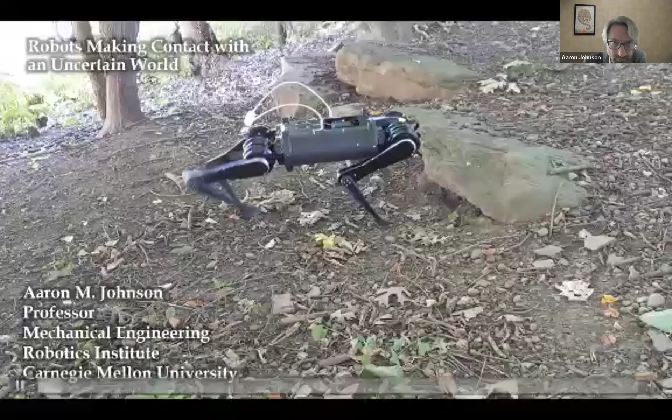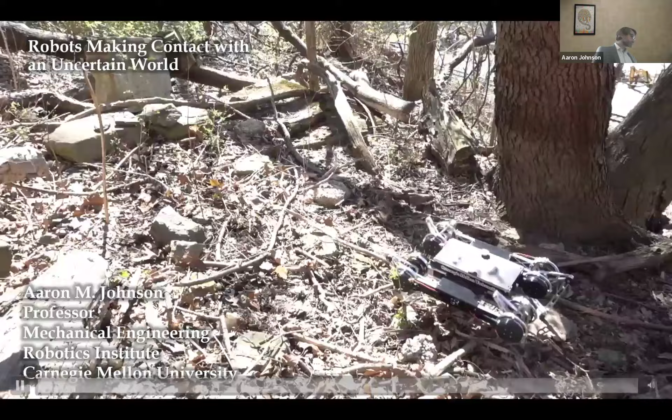We need to give it some time till people show up. The problem is I think the Zoom link was a bit hidden in the advertising. Hope people know about that. Yeah, no one's on Zoom. Yeah, but we're still 5 minutes early. Oh yeah, all right, let's.

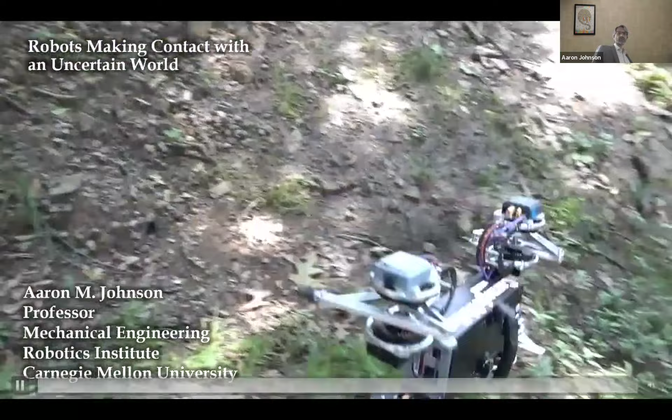Yeah, then I have my video and camera. Or audio, we've used that at least. Actually, I might leave the video on. I don't know, might be videos might work better, if it's not wasting bandwidth on me. Exactly, no it's good. But yeah, okay.

We'll look at this later in the video. Maybe I should put it behind you. Would it be visible if I put it behind you? I don't think so, right? Yeah, probably not. Here, maybe it is. If I turn off my virtual background... No, let me put this one. Don't let me know.

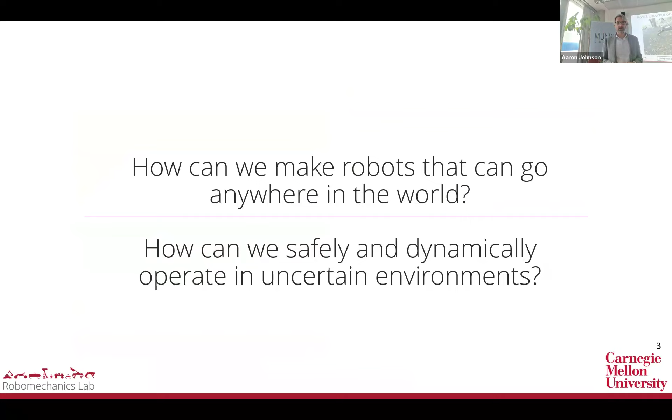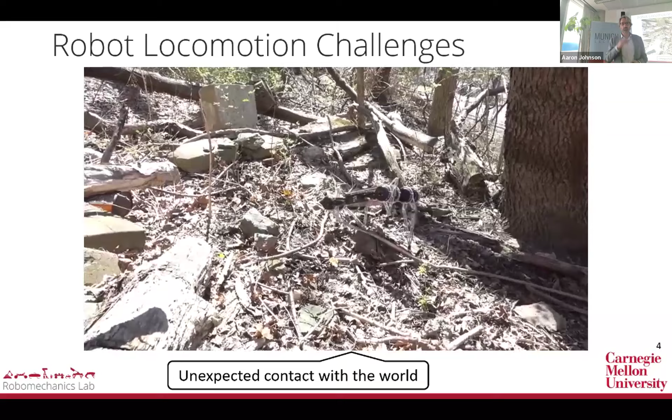On the locomotion side, this was the video playing when you came in—it's like a blooper reel of us testing different legged robots in the park behind campus. What I want you to think about in each of these clips is that the common theme is unexpected contact with the world. The contact is not what the robot had planned.

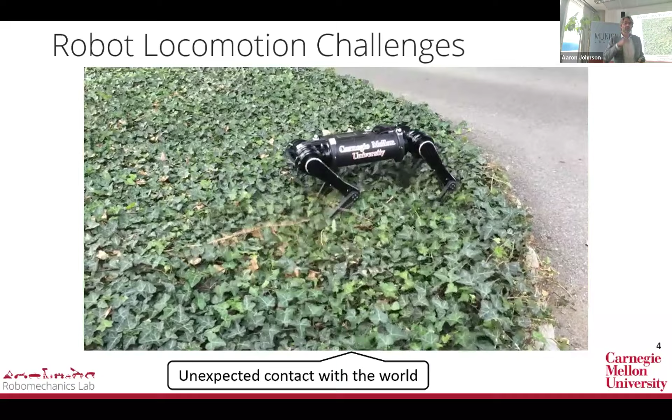So here, it doesn't know that it's touching these vines that are catching it on its legs. Other times it bumps into a branch it didn't know about or thought it could clear, and instead its foot hits it and it gets stuck. And other times it thinks it's going to make good contact, puts its foot down, but it misses, and the foot falls over the edge—there's a missing contact that causes it to fall.

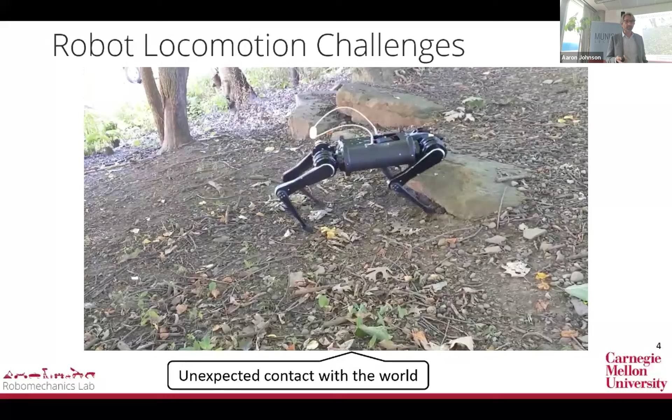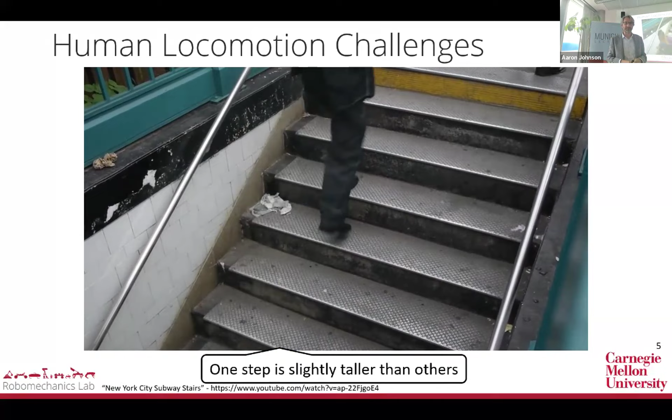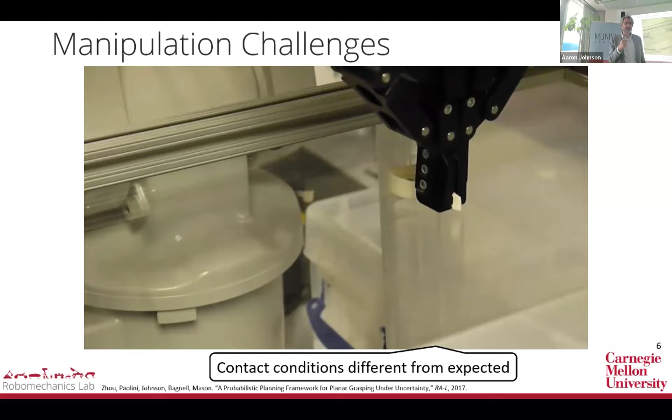So this is exactly the same as the robots. A lot of what we do is locomotion based, but all of these things apply to manipulation as well. Here's another blooper reel from a manipulation paper I was on, where we're trying to pick up small objects. Again, all of these errors come down to contact conditions that are different than what we expected—either the friction is too high or too low, or it goes to squeeze and misses, or it bumps it early and knocks it out of the way. All of these are sort of uncertainty in the contact conditions.

So a lot of the projects, maybe all of the projects in my lab, focus around these two key challenges. The first being...

All right, so the two challenges are contact and uncertainty. Contact, and in particular the discontinuous nature of contact. When my foot is on the ground, I can get very large contact forces. When my foot is a millimeter above the ground, I get zero contact forces, right? And that kind of discontinuity in our dynamics breaks a lot of the assumptions we have in our state estimation, control, planning, even learning algorithms, which assume continuous, if not something stronger, like smooth or convex dynamics.

And then uncertainty. These are all domains where we're not going to know the friction on every single rock that we step on, right? We're not going to know how squishy this mud is. And furthermore, I don't think that we can know these things. It's not just that we haven't done enough modeling or characterized the site well enough—we're expecting to have variability as we move through. So instead of trying to engineer away all of that uncertainty, like you might do in a factory where you can control the lighting and the way things approach your robot, we're just going to embrace that uncertainty and come up with algorithms that don't require a perfect model.

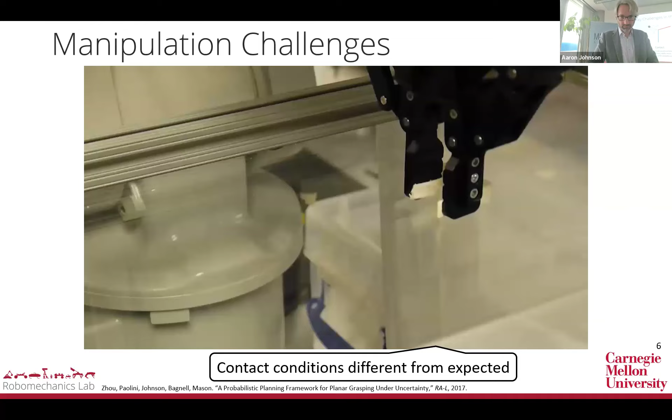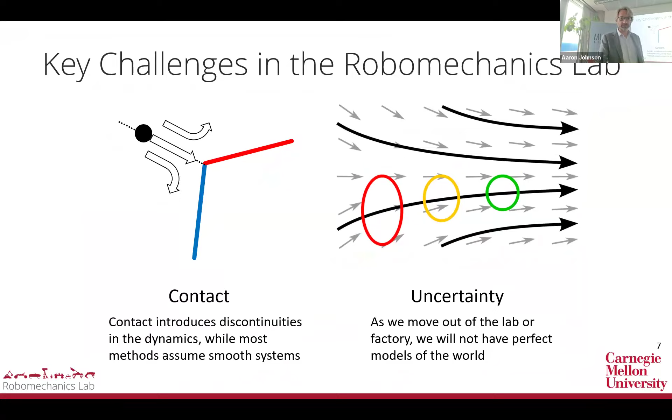Yep, good. All right, so again, two key challenges: contact and uncertainty. I'm going to go through three main projects where these themes come up and how we've addressed them in different applications. The first is going to be Kalman filtering, so state estimation for hybrid dynamical systems. By hybrid dynamical system, I mean systems that have both continuous and discrete state. In this case, our continuous state will be things like position and velocity, and the discrete state will be our contact conditions. So how do we do state estimation when we have changing contact conditions?

First, just some background—what is Kalman filtering? Maybe you took a class in this five years ago and don't remember, or even if you use it a lot, here we can get some notation and terminology in common. The idea with Kalman filtering is we're trying to figure out what our state is at the current time. We represent that as a mean, shown by that dot, with some probability distribution around it, and in Kalman filtering that's a Gaussian. There are two steps in Kalman filtering: the first is a prediction step, where we play our dynamics forward and say, if that's where I was, here's where my new state is expected to be after some time step.

As we propagate that forward in time, we expect the uncertainty to grow, right? Over time, we're less and less certain about where we were because more noise and other things can come in. So then how do we reduce that uncertainty?

We take measurements. Let's say we can see some point out in the world, or we can touch the ground, get some sensor measurement that tells us something about our state. It says, based on that, I think the most likely position is this other spot. And then the magic in Kalman filtering is the optimal way to combine these things to get our new best estimate with a reduced uncertainty from that sensor reading.

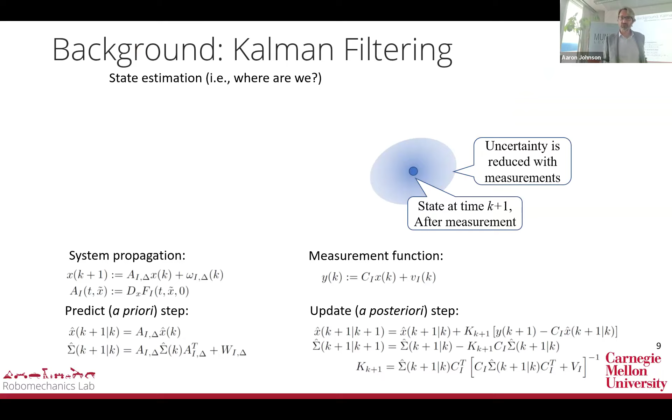What happens if we have an impact? What happens if we have a change in our contact condition? We have this discrete impact, our leg smacks, hits the ground. I'll explain this for the prediction step, but it's the same idea for either step.

Don't worry too much about the math down here, but the key thing to know is that when we're predicting our covariance in the continuous phase, we use this A matrix, which is the Jacobian of our dynamics. That's how we propagate that covariance forward, and it tells us how much our uncertainty will grow and shrink as we move through our dynamics.

So for the mean, we know how to simulate our contact event. We can have plastic impact, elastic impact, whatever model of contact we want to have. But then what do we do about the covariance, about the uncertainty around that?

An initial hypothesis would be to use the Jacobian of our impact law, of our reset map, because that's sort of what we did in the continuous domain. And that turns out not to work.

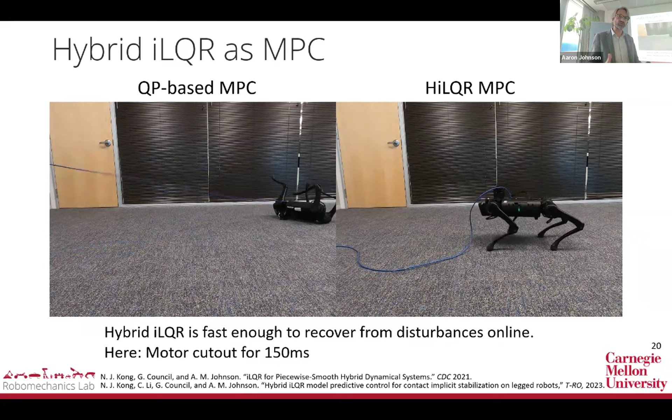All right, so this whole first section was thinking about cases where we have a good model of our contact, in particular rigid plastic impact. How do we reason about uncertainty and propagate that through these kinds of transitions?

Next, I want to talk about a setting where we don't have good models of what the contact looks like. And for this, we're going to think about moving through vegetation.

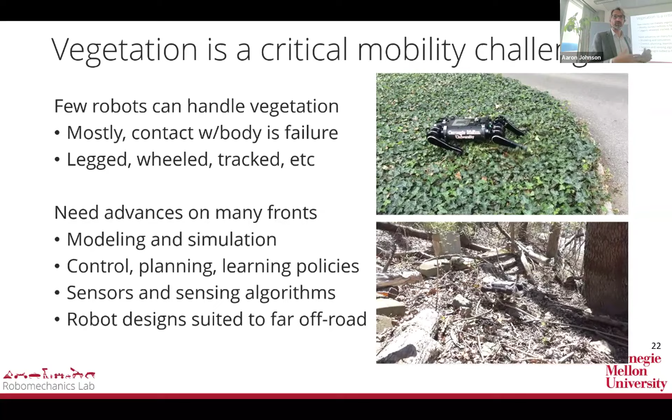This is a critical mobility challenge. We can have our robot walk down the sidewalk, but if we want to get off the sidewalk and walk through that pile of plants out there, the contact is going to be much harder to model. It's going to require much more careful control, planning, learning. Sensing becomes much harder too. All of these things become a bigger challenge when we're interacting with bushes, grasses, trees, these kinds of things.

So we're never going to just walk over the tree. We have to walk around it. Some obstacles you have to go around.

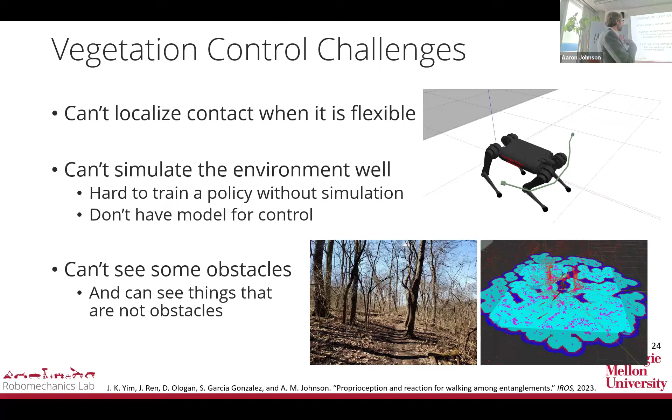So in this kind of forest setting, here's an actual LiDAR scan. All of those pink dots are a LiDAR return from some little twig sticking up, or a blade of grass. If you pass that into your planner, it says there's no path through this space where you don't contact something, which is true. You have to bump into stuff. And so we have these major sensing challenges.

What I'm going to advocate for here is that we think about how we're going to handle vegetation at multiple different levels. Here I've got our model-based hierarchical control scheme, but I think the ideas apply to whatever kind of control scheme you have. Maybe some of these are learned policies instead of MPC.

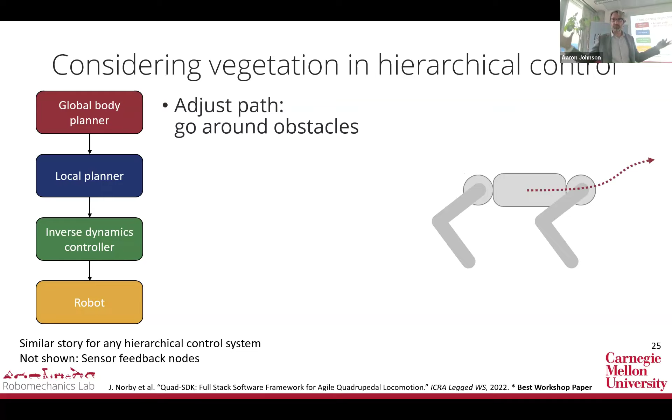But the idea is that at the highest level, your task planning level, you need to adjust your path to go around the big obstacles, right? We got to go around the trees and the big rocks and that kind of stuff. So we need some high-level planning. We want to adjust our gait to maintain our balance and wriggle out of obstacles.

At the foot swing level, we need to come up with ways of disentangling our leg as the foot is moving forward. And then you can even think at the low level joint, usually this is a PID loop, at the joint stiffness level, how do we achieve our plan?

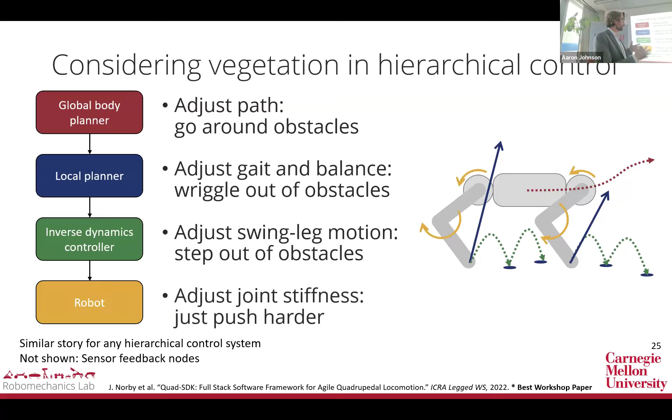Sometimes we just need to push harder, right, if you're pushing up against something. Other times, if it's a rock, that's not going to work. So we need to have a reaction, we need to think about our response at each of these different levels.

So I'll start at the inverse dynamics, this green level here. Our approach to handling vines and obstacles has two main parts. The first is going to be a link momentum observer. How do we know that we're caught on a vine or other obstacle?

The idea with a link momentum observer is that we have a model of our leg. We don't have a good model of the vine, but if we compare what our leg is actually doing to our predicted momentum based on our model, if that deviates by too much, we must be touching something, right? This won't necessarily tell us what we're touching, and we may not be able to predict what the force will be next time, but we can know if we're hooked on something preventing us from following our desired trajectory. And then if we know we're touching something, let's come up with a reactive controller that can get us unstuck from anything.

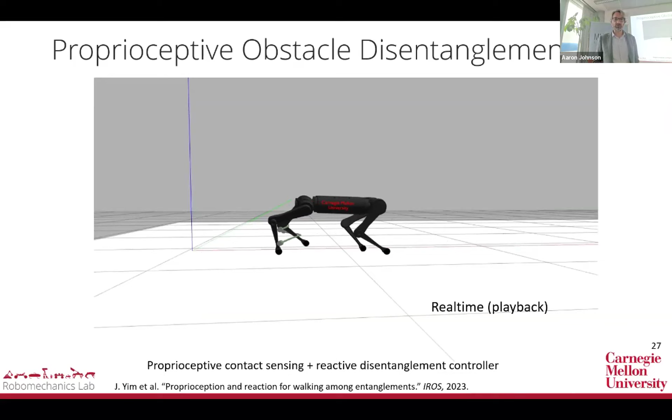All right, so what does this look like if we put this together? So it's going to walk, using this link momentum observer. So when the leg gets hooked, it says, I'm touching something. Let me do this recirculation, get my leg unhooked, and continue making progress forward.

And so this way we have huge uncertainty, we don't have any real model of the vine. We don't know where we're touching it, but we've come up with a strategy where we don't need to know any of those things, right? And that's what gives this the robustness.

So here it is on the robot working on a variety of obstacles. We've got low stiffness as a bungee cord, this is kind of like our vines. We've got a stiff rope in the upper right that's not springy. We've got a rigid beam, so this is just a metal plate. And then the bottom right is all of the above mixed together in some kind of robot torture device where it has to get through all of the obstacles together.

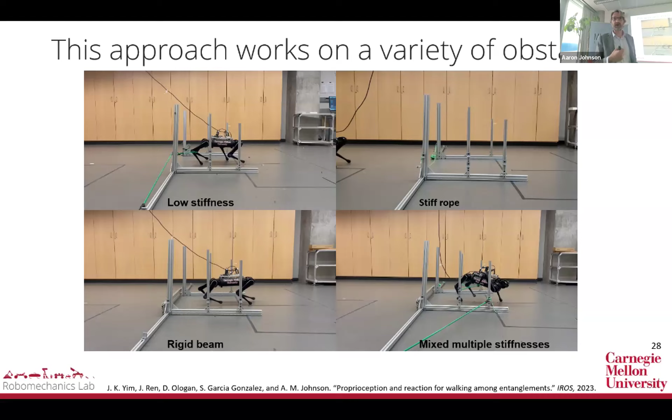But again, because we're not trying to estimate the stiffness of the vine, we're not trying to say, oh, here's where we're touching this one. There can be two things touching. There can be hard and soft mixed together. It doesn't really matter.

And then my favorite, we took a soccer net and laid it out horizontally, so it's just a field of things to get tangled up on. It kind of trips a little bit, as you'd expect, but it's able to get its legs disentangled and continue making progress forward.

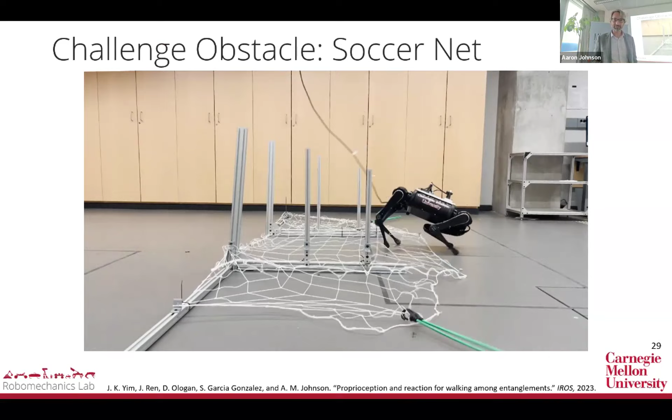So this was how we disentangle at the leg retraction level. If we go up a level in our control hierarchy, we can advance our leg and take another step, but we may not know what we're walking on.

On the left is the robot's model of the world. On the right is what it's actually walking on in simulation. This is the case where you have grass or other vegetation - you can have a camera or LiDAR, but that's mostly going to see the top of the grass, not what your legs are actually walking on. So we use proprioceptive sensors to feel where the ground actually is and build up a map of the terrain as we walk around.

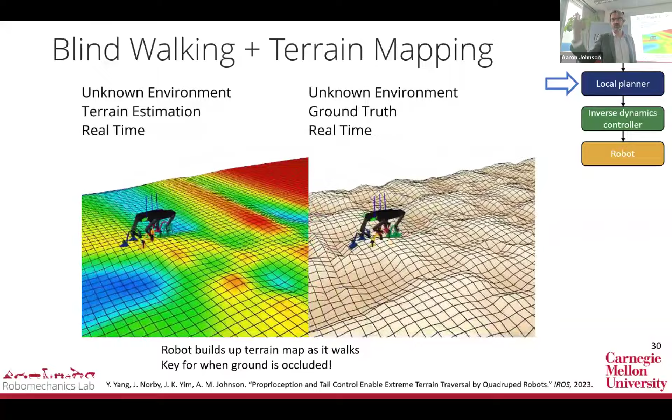Now we can plan on that map for the next step. Maybe I'm not expecting a mound of dirt right there, but as soon as I touch it, I know it's there, and I can plan accordingly as I continue moving forward.

So we reduce that dependence on exteroceptive sensing that's going to have occlusions. And then we can go even higher - there's lots of ways to do this, but the short story is go around the trees. We're not going to try leg disentangling to walk through a tree, or even use the proprioceptive approach. We could walk into the tree and tell that we stopped making progress, but for big things we want exteroceptive sensing to see there's a tree and plan around it. We've written papers on path planning, but any high-level planner, we still want that at the highest level.

So what have we learned about walking through vegetation? I think modeling the vegetation is the wrong direction to go - there's too much variability, we're never going to know these parameters. Instead, let's come up with approaches that don't require a perfect model and can be robust to huge amounts of uncertainty in the state and in the model. And then we need to think about how to handle this at different levels of our control abstraction.

I should also mention all of this quadruped control stuff we've done in the lab is part of our Quad SDK open source control stack. So if you want, you can download the code and run all of these examples afterwards, including the vegetation disentanglement. This is a pretty standard control stack that most of my students take, and then say, let me try to beat this with a learned controller, or let me replace the state estimation. So we build out from here.

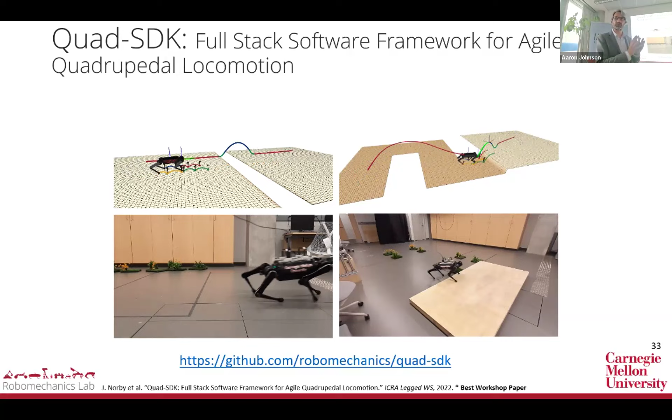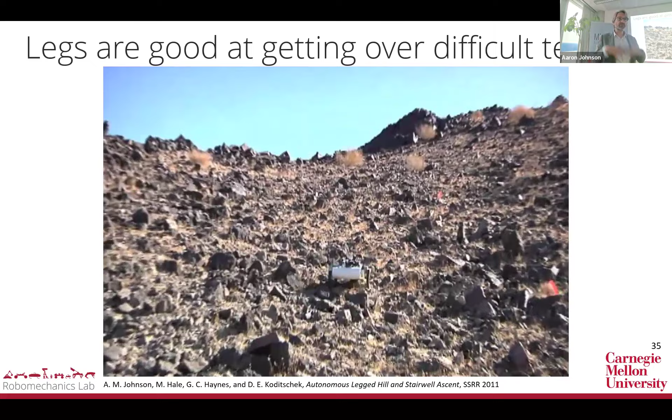The third thing I wanted to talk about today was learning how to drive over different kinds of challenging terrain. First, thinking about the platform we're using - legs are very good at getting over rough terrain, and this is what the legged community has been selling for years: if you need to get over rough terrain, you've got to have legs. This was from my PhD, before we had all the quadrupeds. But now the whole quadruped market says if you want to get over rough terrain, you need legs.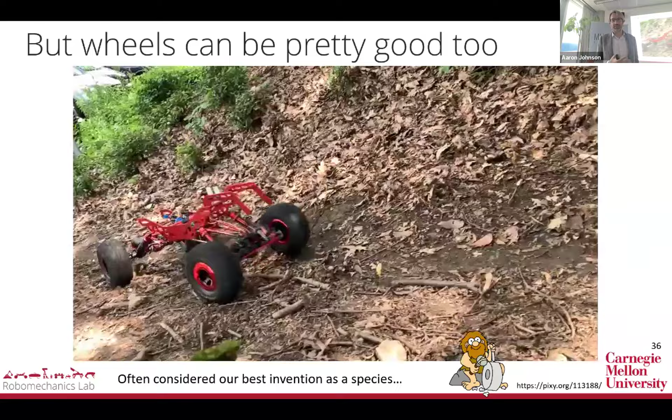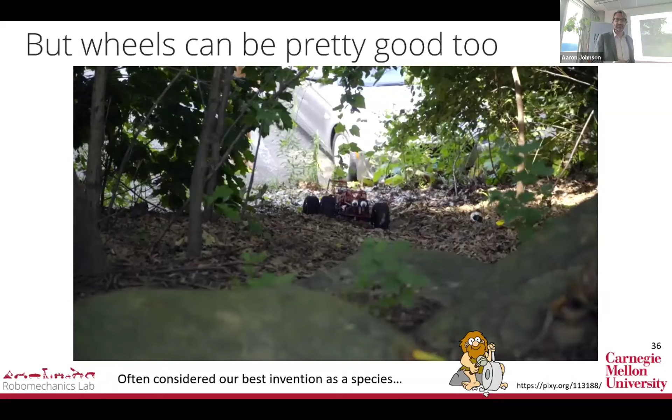The only caveat is you need a pretty good driver - when I drive it, it flips over. But when my grad students drive this robot, they can get over huge rocks, large obstacles that people traditionally say you need legs to get over. So how do we make this kind of off-road driving with a more capable wheeled robot autonomous, so you don't need the well-trained grad student?

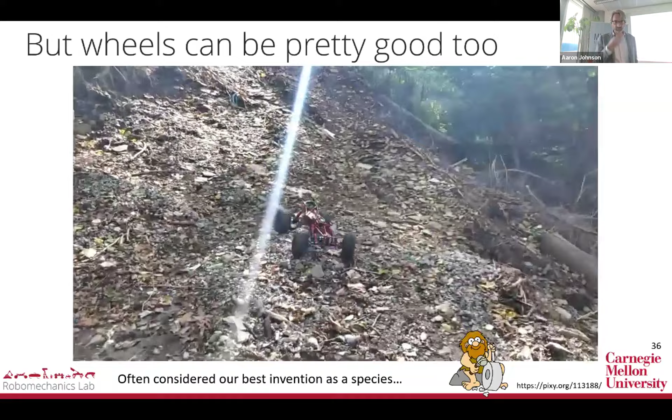So a lot of these challenges are the same as before, but again, we're not going to have a good model of the environment. Maybe we'll have some geometry for where the rocks are, but I'm not going to guess what the squishiness of those leaves are. So we really need to think about stochastic dynamics and how that uncertainty is growing. Collecting data is very expensive, so robot time takes actual time. And if you collect thousands of hours of data from your robot, you have a different robot at the end than at the beginning, because it's worn through all its bearings and picked up some dirt along the way.

It's hard to directly learn in simulation because we don't have good models, but it's also hard to learn in the real world because it's too expensive. We want to think about many different types of terrain, so there's infinite variability there. We also need to do long horizon predictions. We need to approach the rock from the right angle and make sure we don't get stuck high-centered on something, so we need to be planning ahead and not just reacting. I'm going to go through the components that go into our solution for learning how to drive over different terrain.

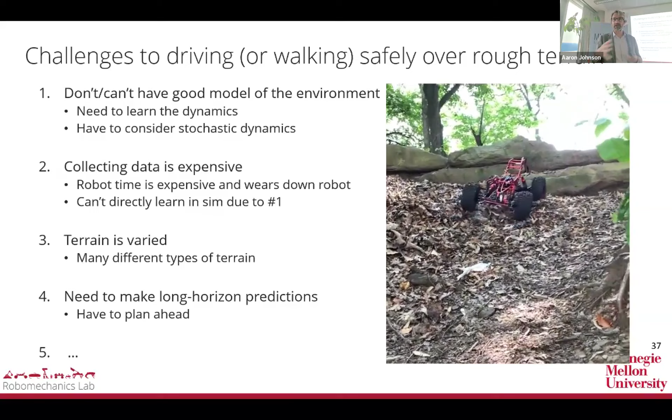The first ingredient is that we should be making closed loop probabilistic predictions. The open loop dynamics here are very unstable, but we're never actually going to run an open loop controller - we're going to close the loop, we're going to have sensor feedback. So when we're planning, we need to be planning according to that closed loop prediction. Secondly, we need to be making probabilistic predictions - we're not going to know exactly what the friction is, so let's account for that uncertainty and think about how it's going to grow and shrink over time.

Once we have these probabilistic predictions, we need to constrain what I'll call the divergence of the trajectory. So here, if we want to go up this slope - if we just do a single trajectory plan, we'll come up with this red trajectory, and our nominal model thinks we can make it up this hill. But actually the friction's slightly different, and the robot can't quite make it. Here we see the actual robot in green - the nominal model in red thinks we can make it up the hill.

When we actually run this on the robot, in this simulation, it drifts off to the side because it doesn't have enough traction. But if we have a probabilistic dynamics model, we can watch how this collection of predictions diverges. In general, we want to avoid places where it really blows up - maybe in some worlds we can make it up the hill that way, but the chances are pretty low. So we want to look not just at the magnitude of that uncertainty, but how much it's growing or shrinking in any one time step. Ideally we find time steps where the uncertainty is reduced, but at a minimum, let's cut out the time steps where it blows up like this.

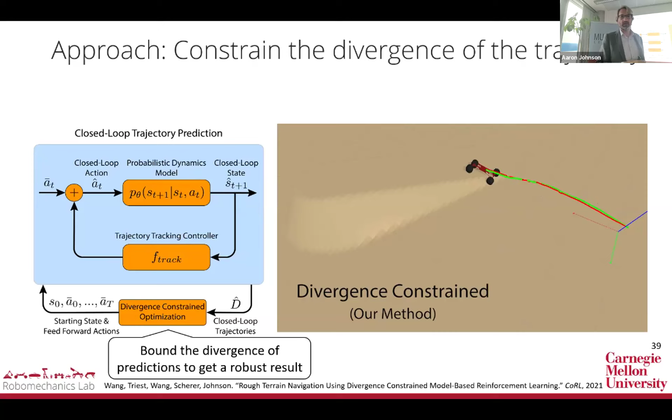We call this divergence constrained optimization. Here it is on the robot - you can see these red particles. Some versions of the dynamics think we can make it over that obstacle, but not all of them. If we just penalize that instead of constraining, you get really conservative behaviors where it doesn't want to allow for any amount of uncertainty. That's why instead we want to constrain the growth of the uncertainty and come up with plans that are maybe a little bit longer - we have to go around, take the ramp, but don't have too much uncertainty.

Next piece is that we still want to use lots of simulation. Simulation is a great tool - it's cheap. Now we know that it's wrong, we don't have a good model, but it's close - it roughly looks like driving. So how do we use a lot of simulation that's wrong, but readily available? What we're going to do is randomize the domain. But unlike most sim-to-real methods, which use this domain randomization and throw all of that data into one big bucket.

Here we want to keep these different domains separate. On the right, I'm representing by the colors different versions of the dynamics. You can see some of the robot bodies are longer or shorter or wider, but we're randomizing the mass and the friction and all sorts of different parameters. We're keeping all of these separate.

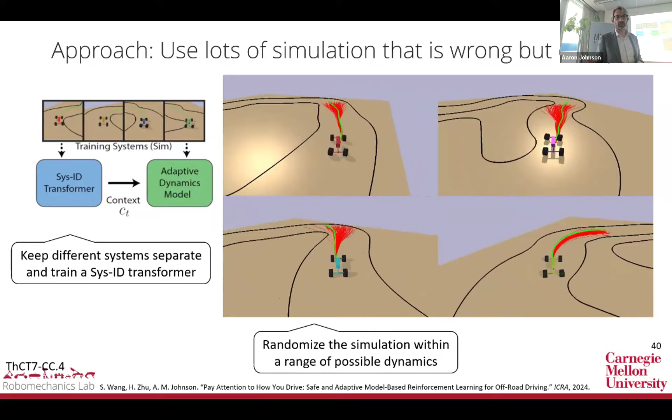In addition to learning our dynamics, we're also learning what we call a sys-ID transformer. We're trying to do system identification in parallel to the dynamics prediction, so that if we can learn where in this model space we are, online we can use a little bit of data with this system identification to figure out what our current model is. We use lots of simulation that's wrong but cheap, and combine that with a little bit of real world data. By little bit, I mean on the order of 5 or 10 seconds of robot data, depending on what you're doing. Then online, we take our actual observations, pass it through that same sys-ID transformer, and learn what our current context is.

This allows us to adapt to different terrain, but also different wheel friction and throttle gain and steering and all of these other things.

Finally, the last piece here is to wrap this in a risk-aware controller. We're using MPPI for safe control prediction. So we have this probabilistic dynamics model, and we need a controller that can reason about that and not take any actions that are too risky based on our dynamics.

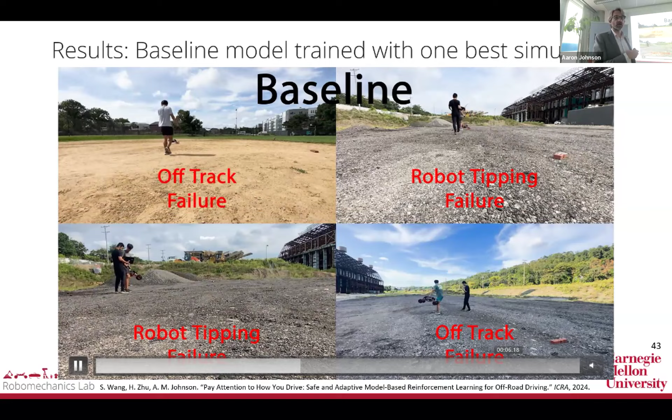So what does this look like? If we train a policy with just our one best simulation — do whatever sys-ID we need to do once, get a good model of the robot — and then try and run it on different terrains, with different wheels swapped for different friction, different masses, we see that it falls off the course or rolls over and struggles on these different terrain.

Then using this sys-ID transformer to adapt the model online using a little bit of data, we're able to handle all of these different conditions. This is both the terrain, but also the friction, the mass — we're changing a lot of things between the charts.

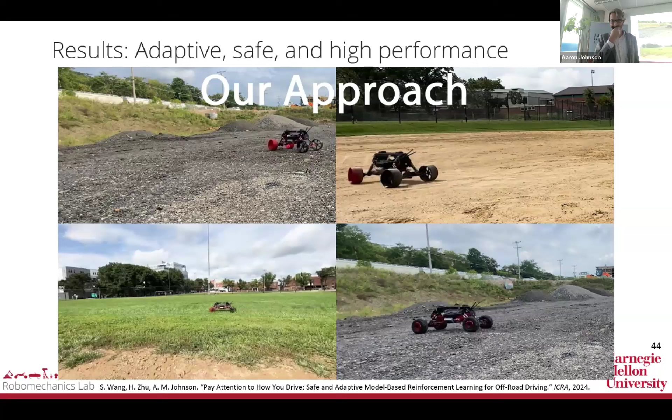So we had a lot of pieces here. To put this all together, we need adaptive dynamics models where we're simulating different variations, then training both the dynamics prediction and how to tell where we are among these models. And then we're doing closed loop divergence constraint planning to come up with robust trajectories based on that model.

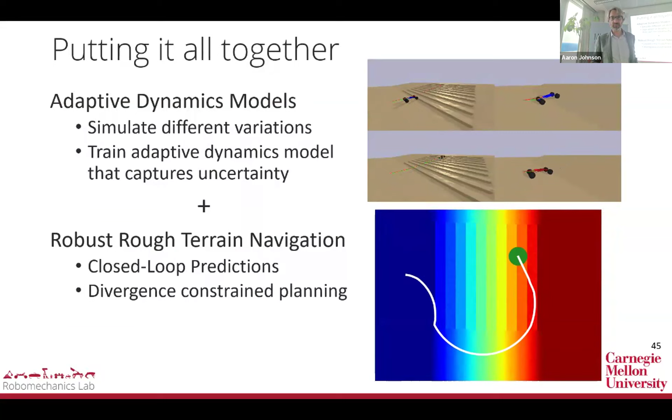A really simple example here to show how this is working. We've got two versions of the system: on the left, low friction wheels, and on the right, high friction wheels. When we first start up the system, with no experience yet, we don't know anything, so the two systems act the same — there's no difference in the data going into them. So they come up with this less direct route to the goal; it's not confident it can make it over the hill, so it'll go around.

It's actually kind of interesting — it can reason that even if it's not sure about its dynamics, it can probably drive across the stairs, but it's not going to try and drive up the stairs. This is the initial robustness — initially it comes up with policies that work whatever the dynamics are.

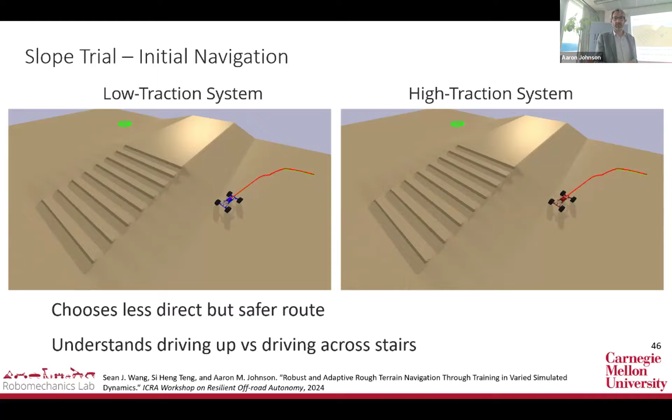Now let's give it a little bit of data from the system. We're going to give it one observation — this is the only data we're feeding in from the actual system. And that's trying to drive up the stairs.

And in the high traction system, we can drive up the stairs no problem. And in the low traction system, it gets stuck. It can't go up.

So this is when I say just a little bit of real world data. This is the only data from the specific system that's going in.

And then after we take this data, the adapted control policy—the next time we ask it to go to that green circle, for the low traction system, it's still taking the long way around because it can't make it over the hill. But the high traction system has learned that it can go up this steep slope and over, having a much more direct path.

And this is even though we didn't give it any examples of it driving up that slope—we only showed it the stair climbing. But it learned that generally, if you can drive up stairs, you can also drive up ramps and other things.

So that's how we describe this learned control system as initially robust. The initial policy works for all of these cases. But then with a little bit of real world data, it's able to be adaptive to the specifics of the system.

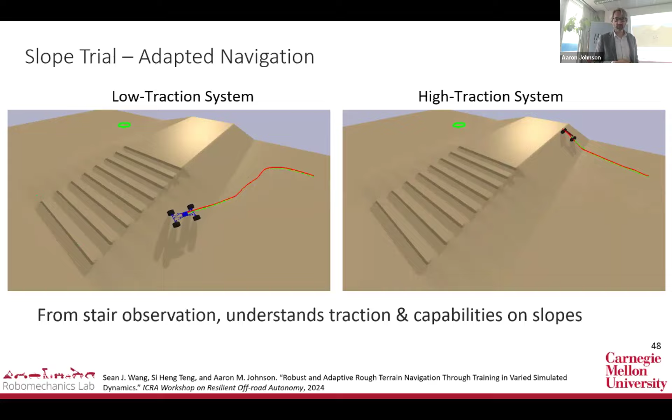So what have we learned from this learning-how-to-drive section? We want to consider both epistemic and aleatoric uncertainties—the uncertainty inherent to the world, but also the uncertainty that comes from not having enough data yet. We have to initially collect some data, and as we go, maybe we'll become more confident.

We want to combine lots of simulation because it's cheap, but it's wrong, and then find a way to combine that with a little bit of real world data. If we just took that real world data and threw it in with thousands of hours of simulation data, it's not going to really affect anything—it'll get drowned out by the simulation. So we need clever ways to combine lots of simulation data with a little bit of real world data.

And then finally, think about the divergence in our uncertainty to make sure we don't take overly risky actions as we're going.

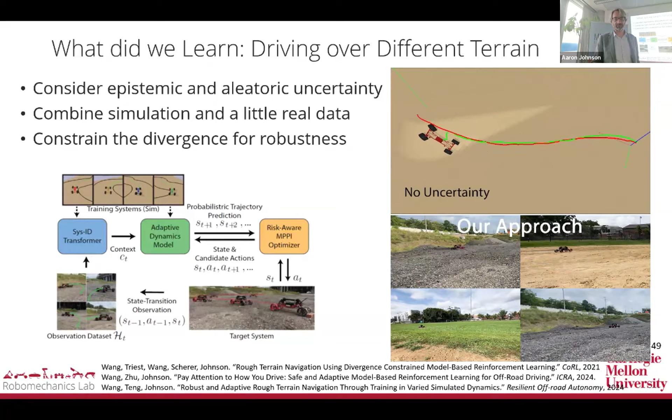All right, final thoughts. I covered way too many things in this talk. But I think the common theme from all of these was that we need to carefully consider our contact conditions—that's true in mechanical design, control, sensing, and learning.

We need to develop strategies that work no matter what the uncertainty is—not just strategies that try to reduce that uncertainty, but strategies that are robust to that uncertainty.

And then we should be reacting and adapting at multiple levels. We need to be thinking about short-term adaptations, long-term adaptations—there are multiple timescales that work here that we should be considering.

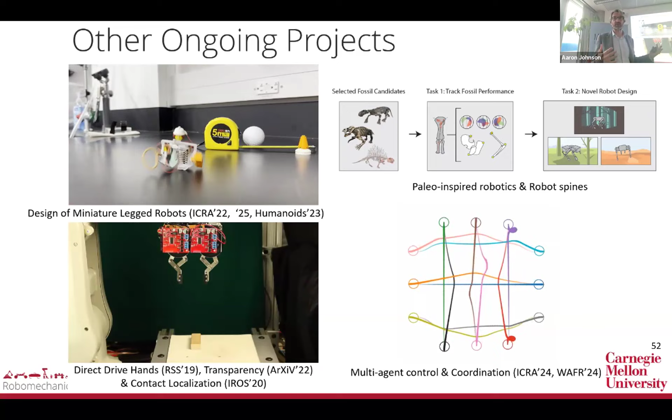We're doing paleo-inspired robotics, so I have a paleontologist in my lab—I think if robots weren't cool enough, we're doing dinosaurs now too. So what can we learn from the fossil record that can tell us something interesting about robotics?

And then I just had a student yesterday defend his thesis on multi-agent control and coordination. We're using a lot of the same ideas about MPC and uncertainty and that kind of stuff.

Before I end, I just want to say a few words about supporting diversity in robotics. So hopefully it's not a surprise to anyone here that the diversity of the robotics community looks nothing like the diversity of the rest of either the country or the world.

And what's more concerning is that these diversity lines are not really changing over time very fast. There was one study looking at the percentage of women in robotics, and it showed that while it is improving over time, we aren't going to reach gender parity until 2050 something.

The first is to join a networking or advocacy organization. I've done a lot of work with Black in Robotics, but there's also Women in Robotics, Queer in Robotics. You can think broader - Black in Computing, Black in Engineering - sort of broader communities.

I invite you to read, cite, invite, mentor, and collaborate with a diverse set of researchers. So if you came out of this talk saying, man, I got to read some more papers, maybe don't go to my website. You can go to the Black in Robotics reading list and find interesting research from maybe someone you weren't aware of that's in your area.

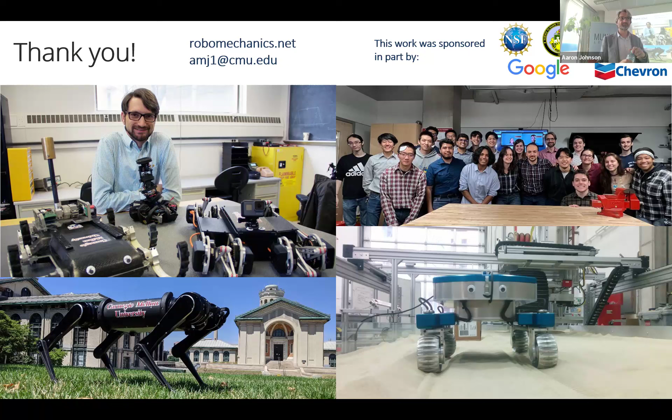We do want to do lots of simulation, right? What I'm saying when I say that it's wrong, I mean the prediction - what the simulation outputs is not going to be exactly what the robot does in any given trial, right? Especially if we're going on grass or some other terrain that we don't have a model of, we can play with different friction parameters in simulation. We can get a variety of driving behaviors in simulation, but it's not that any one of those would correspond with this robot driving on this terrain, with this payload, after it's rained, right? All of these sort of infinite variability. So that's what I mean when I say the simulation is wrong - we don't think it's going to ever predict exactly what's going to happen in this situation, right? It generally looks like driving, right?

So that's why we want to try and capture that sort of general behavior. But we don't want to just do a model predictive controller with that as the model, or just learn a controller based on that simulation model, because we don't think that's going to be accurate, especially when we're pushing the boundary on the environment. Maybe we could have a good enough model of the robot itself, although even there, you throw a new payload on it, or you've run a lot of trials so the bearings are starting to wear out, right? Or the tires aren't inflated all the way, right? So there's still some variability in the robot. We're probably better at capturing that variability, but I don't think we're ever going to capture all of the different terrain we can drive over.

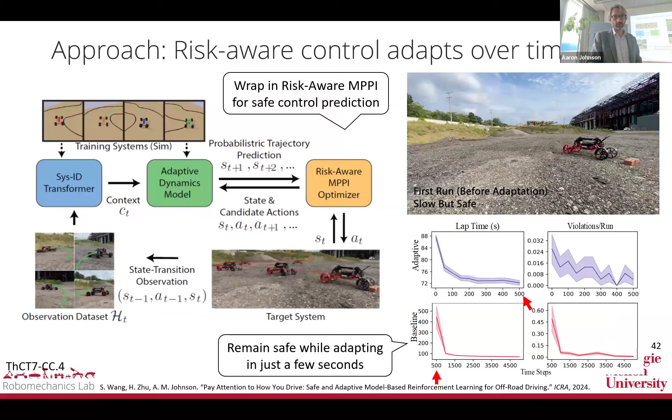Another question, very short. So for those trajectories, there is no rule, they're different. For those, like when we show the different rollouts... like in, oh not that one. You mean like in... I don't know, like in, yeah, this, no, that's the no uncertainty one.

This one, yeah. So these are independent samples, but each of them is a closed loop prediction. So if in that sample you get bumped a little bit more to the left, then you adjust your steering accordingly in a closed loop control. But they're independent samples, yeah.

And how from one to another, how do you solve how? So this is all coming up with one plan, one policy, and then we're doing multiple rollouts of that, with uncertainty in our state estimation, and then uncertainty in the dynamics, and that all comes from a learned model that's learning what that uncertainty will be.

There's also uncertainty at the system identification level. So when I get down to here, the system ID transformer is also probabilistic. So initially there's a lot of uncertainty in our system identification, in our friction and mass and everything, and that propagates over to the dynamics, so all of that probability flows through.

And then when we do these kinds of rollouts, if they're all trying to achieve the same control policy, just in different worlds, those will end up with different outcomes. And then the idea with the divergence constraint is we really want to avoid the places where those outcomes diverge significantly. I think through the MPC loop, it goes to the next trajectory as well, right?

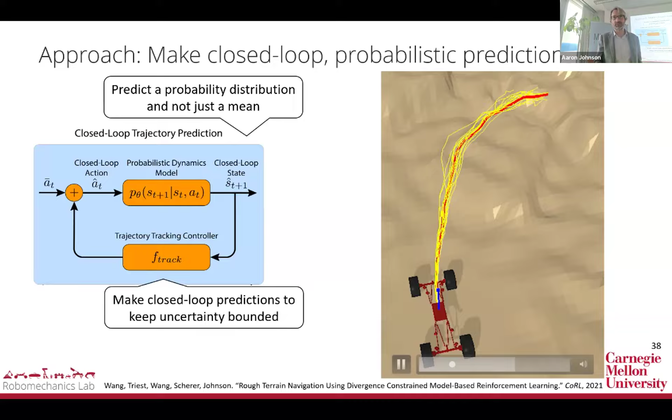So what we've done, I didn't talk about it here, but we have done some stuff with this direct drive hand doing contact localization. If you're touching something rigid, this works pretty well, where you can figure out with no tactile sensing, just proprioceptive sensing, if I touch here, where I must be touching along the link.

But that relies on the fact that the thing you're touching isn't also moving, right? And if it's also moving, then it just goes out the window. So that's why in the vegetation stuff, we're not trying to localize the contact at all. We just want to come up with, the link momentum is really saying, I'm touching something.

We're not going to try and translate that into where on the surface we're touching, or how many things we're touching, or even if we knew those, we don't know when I push it more, like what's the stiffness or damping, how is that contact going to slide? How is the force going to ramp up or down? So we don't have a model of the thing we're touching, so even knowing where we're touching is maybe less useful.

So we just wanted to know, are we touching something? And it's really sort of inherently, are we touching something that's stopping us from making progress? If we're touching something but we're continuing to move, that's fine. But if we're touching something that's preventing us from moving our legs, that's when we have to react. That's kind of inherently what we're getting from this link momentum observer - when the thing we're touching is enough to disrupt our motion, then that's when we have to do something about it.

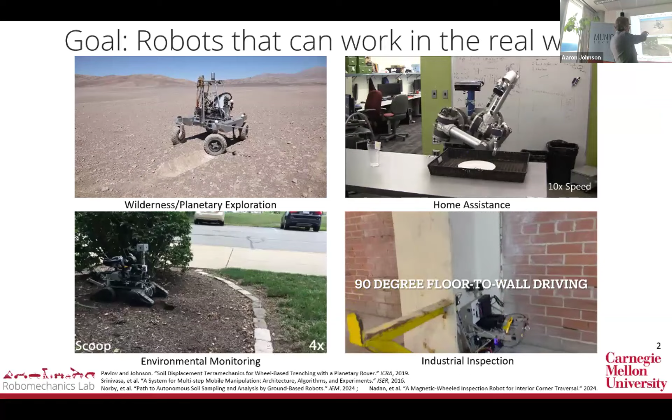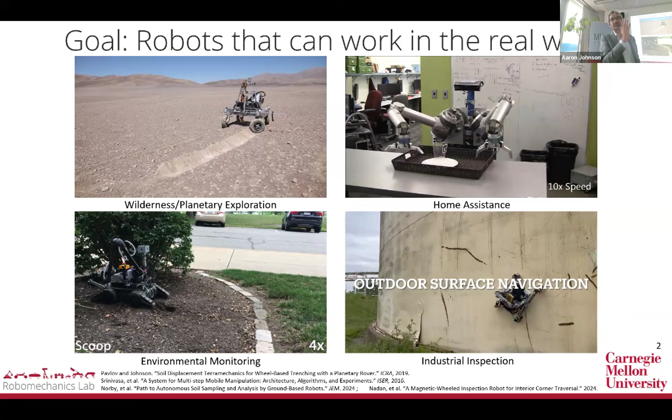Perfect, so I don't have a slide on it, but this work up here was using a Mars rover kind of vehicle. Here we're showing trenching - we're turning the wheel sideways and running it much faster to intentionally dig a trench in the ground. But all of this modeling work to do that trenching also works if your wheel happens to be stuck at a weird angle, or if it's running slower than the other wheels.

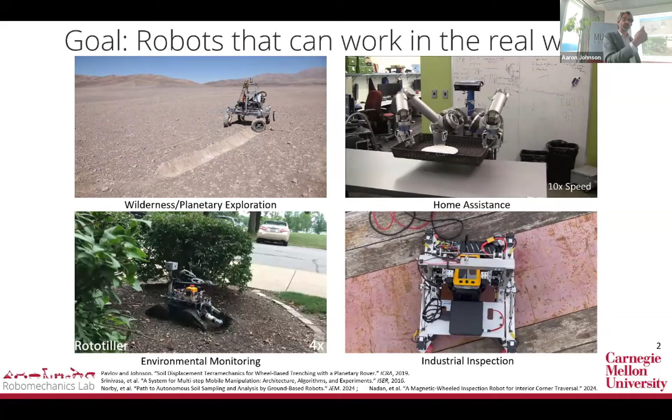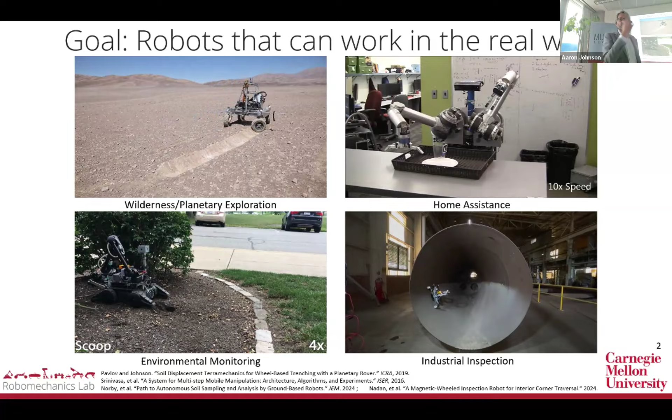And so the newer work in that line from us is capturing the terramechanics of the wheel-soil interaction at these kind of more extreme angles and speeds. Then we can use that to design open loop or closed loop controllers that compensate for actuator failure, either steering actuator or drive actuator that are stuck or loose or whatever. Once we have a model for what the forces are in these extreme cases, then we can compensate for them with the other wheels.

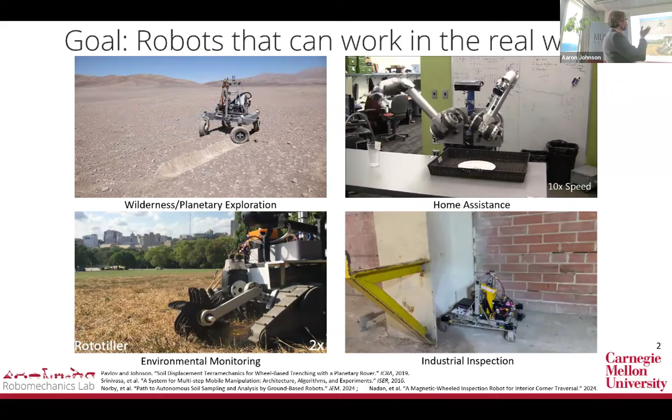And it's a little hard to see - the other wheels are not driving straight, right? If you just had 3 wheels driving straight and 1 wheel doing this, you'll go in a circle. It'll act like an anchor dragging. So you do have to compensate for that with the other wheels. In that video it's just done by hand, but more recently we can do that automatically.

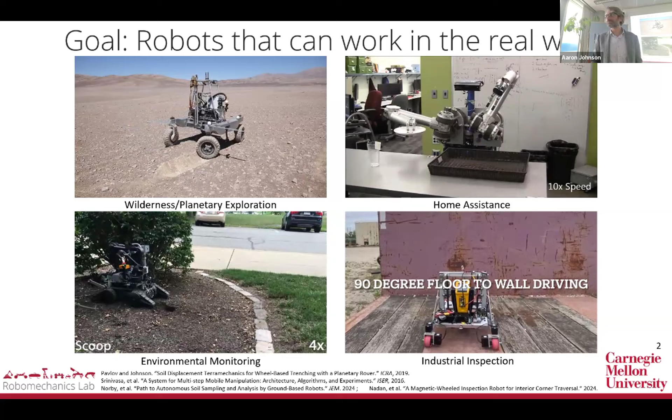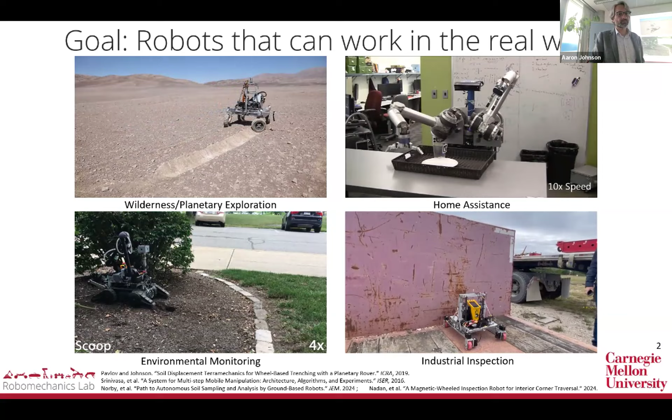All right, so I think the key here is when we're not touching something, we have a good model of the legs. And it's only when we're touching something that we have a bad model. But that's all we need, right? We're just trying to figure out, are we touching something that's hindering our motion? So we only need to model the leg when it's not in contact - this avoids the need for a model of the thing we're contacting.

So it's just rigid body dynamics for the leg. It does a moment - we're comparing the estimated momentum versus the predicted momentum, and integrating that up is kind of all it's doing. So that's using a model where we're not touching anything. It'd be much harder to have something where if I'm touching one thing and then I start touching another thing, now I don't have a model of either version of the dynamics. But here we have our nominal dynamics, we assume we can model that reasonably well, and it's only when we're interacting with something we don't know about that we will have an error we can detect with this link momentum observer.